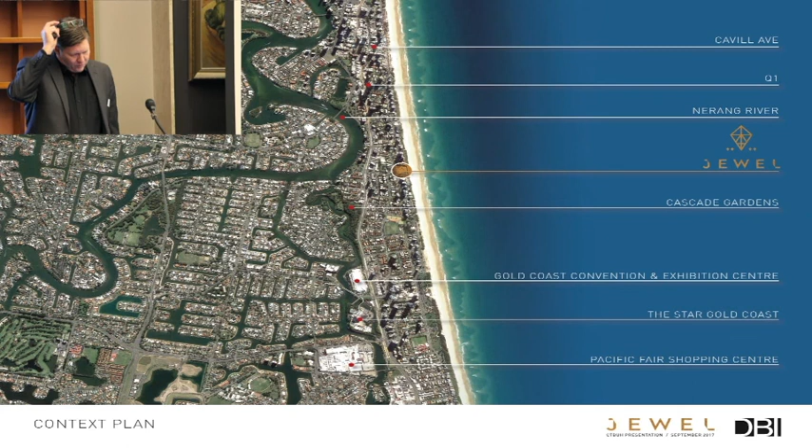When the site was first amalgamated, it was back in the pre-GFC days. Back then, the strategy for amalgamating key sites was basically just keep throwing money at it till people said yes. Ultimately the site ended up costing $125 million for an 11,534 square metre site - about 11,000 square metres, roughly $11,000 per square metre, which at the time for the Gold Coast was actually very high, but given some of the prices these days it's probably on the low end.

The site is exactly halfway between Surfers Paradise and Broadbeach. Surfers Paradise is viewed internationally as the more tourist-focused destination, whereas Broadbeach is more for locals, if you like - that's where we tend to want to be.

The boundary with Surfers Paradise is Wharf Road, so the Surfers Paradise precinct is to the north, and Broadbeach is immediately to the south, so we were in the high-rise precinct. The site has 112 metres of absolute beachfront land, so at the end of that amalgamation process, it is the largest piece of absolute beachfront land available on the Gold Coast.

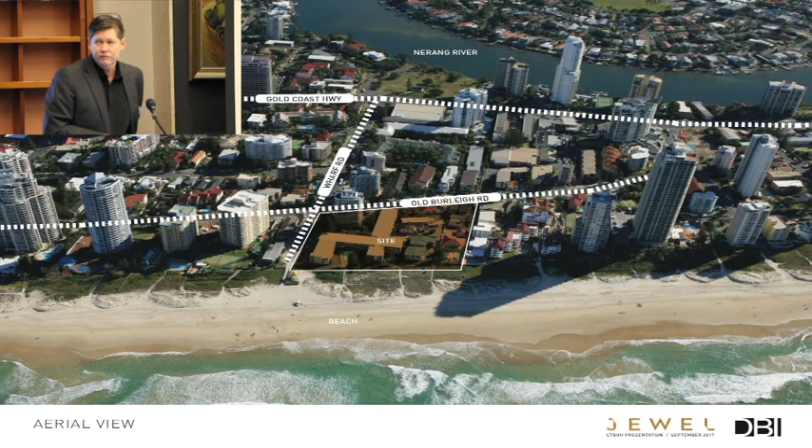This particular part of the high-rise spine - those who know the Gold Coast know it's essentially right along the beach edge - this part of the Gold Coast had been neglected by developers for some time. As you can see, it's mostly 3-storey walk-ups, some 7-storey buildings, 15 and 25 storey buildings. The tallest building is actually Aquarius, which is about 40 storeys, but other than that it's pretty old stock in this region and quite low rise.

The proximity of the site to the new Light Rail Station, the Nerang River, and Nettie Harper Park there - there's also talk about a future ferry terminal that would connect back up into Surfers Paradise, Broadwater, SeaWorld and run through there. With the Light Rail Station, bus stops, and the main Gold Coast Highway, it was seen as a good location in terms of connection, and as I said, halfway between two main precincts on the Gold Coast.

One of the most often heard complaints about the Gold Coast is its poor utilisation of beaches and respective facilities. Presently the only way visitors and tourists can actually enjoy some food and a drink while being close to the beach is to go to one of our surf clubs.

There's actually only 4 restaurants that are right on the beach on the entire coastline of the Gold Coast. Unlike when you go overseas, where resorts are right on the beach, that's not the case here. So Jewel was thought to be a significant step towards rectifying the situation.

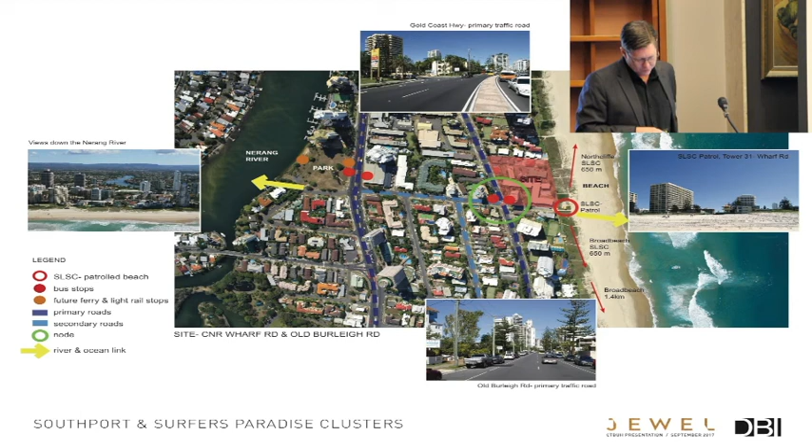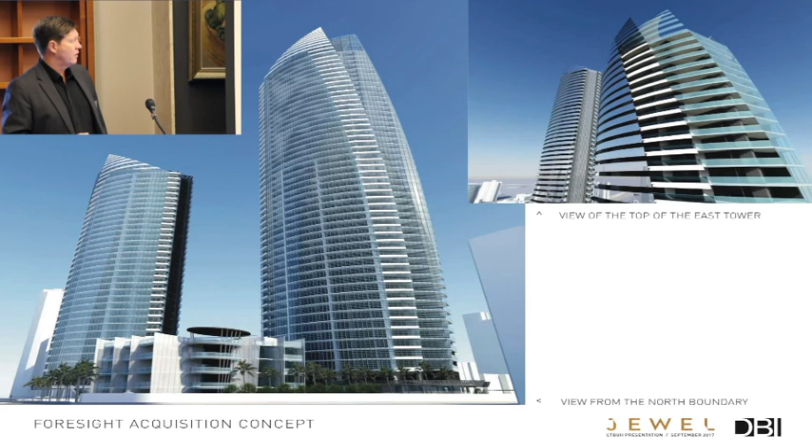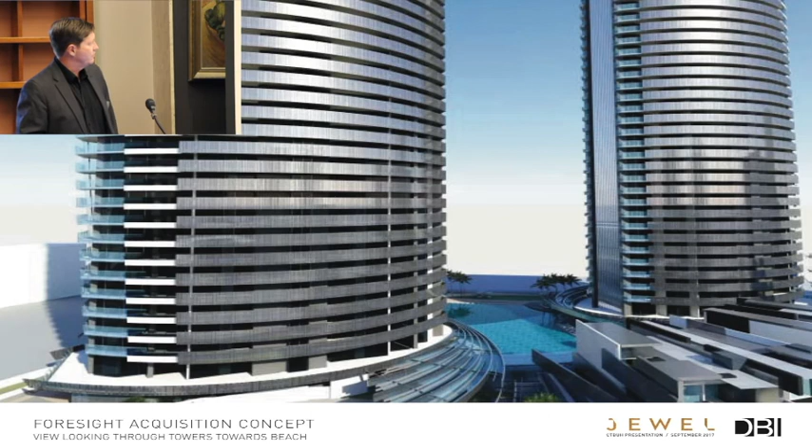The initial concept was by Foresight Acquisitions, and it was a typical residential play. It was high-rise, all apartments at the higher end of town, some beach villas right on the front, but once again, it was intended to be high-level amenity, pools, spas, gymnasiums, that connection through to the beach.

Then basically along came the GFC, and the developers struck some funding issues, and it was at this time that the Ridong Group from China purchased the site in mid-2010. Stephen Haggart was the then CEO of Ridong Group Australia, and decided that they wanted to do an international design competition.

So it was a selected competition, and the great thing for us was that we got to pick who we wanted to work with. So we sat down with Stephen and we worked out that it'd be great to work with Ken Yeang from Llewelyn Davies Yeang. He's probably one of the most respected architects in sustainable design within our profession.

They're based out of Singapore. Marks Barfield from London - they developed and designed the London Eye, that's probably their most known project. And then Chad Oppenheim from Oppenheim Architecture in Miami.

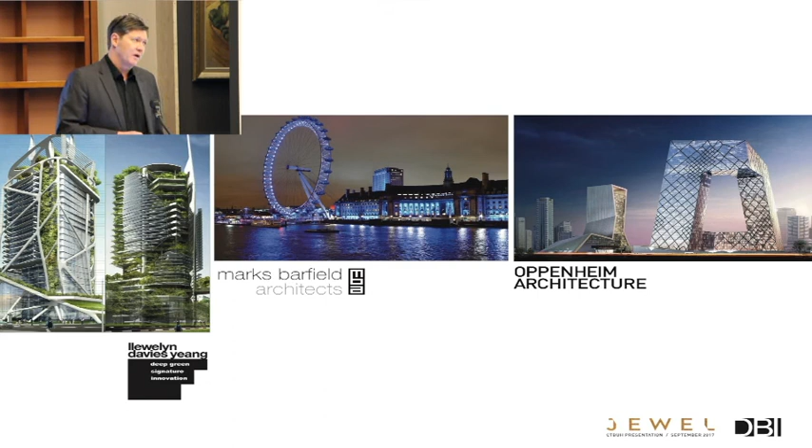So the Gold Coast, as people probably are aware, has always been referred to as Australia's version of Miami, with a similar climate, being a beachside tourist destination city. So we thought it made sense to see what the top architect in Miami was working on at the time.

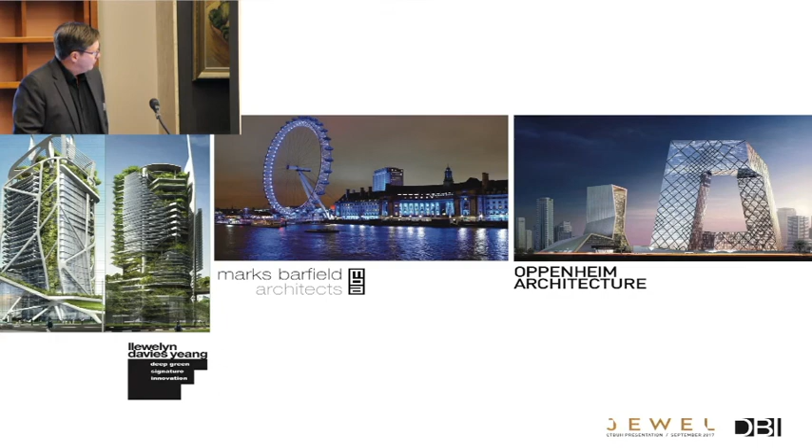So when the guys came over, we got to basically give them a briefing of what we thought were the main influencing factors within the Gold Coast and the greater region.

So the first element that we drew inspiration from was the geometric forms and crystalline volcanic structures that underline the geology of the Gold Coast region. This topography basically came from the result of the Mount Warning shield volcano - actually one of the oldest volcanoes within the world. So that basically created the region that we live in.

Some of it can be seen on all the headlands in New South Wales and the Gold Coast with these rocky kind of outcrops. So this is the Giant's Causeway in Fingal, and really kind of represents some of the structure that we could take from nature.

The second influencing thought was the rainforest that actually surrounded our city. Between Tweed Shire and Gold Coast City, we actually have some of the - I think it's actually the largest amount of World Heritage listed parks and reserves anywhere in Australia. So we're basically trying to bring the rainforest back down to the beach. These were some of the ideas that we explained that we thought were key to this potential project.

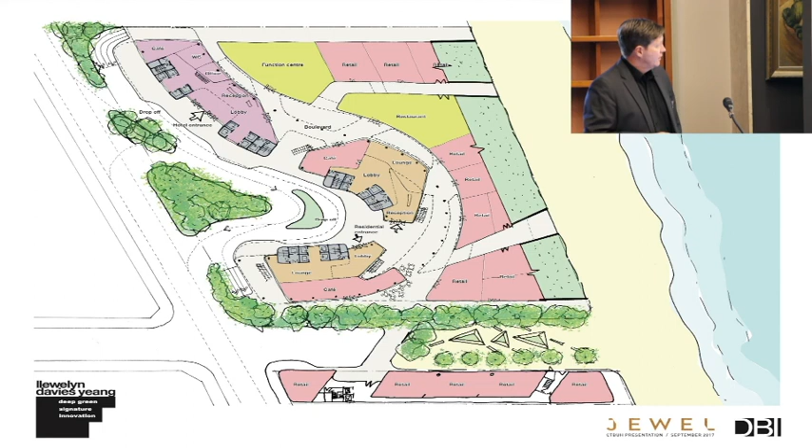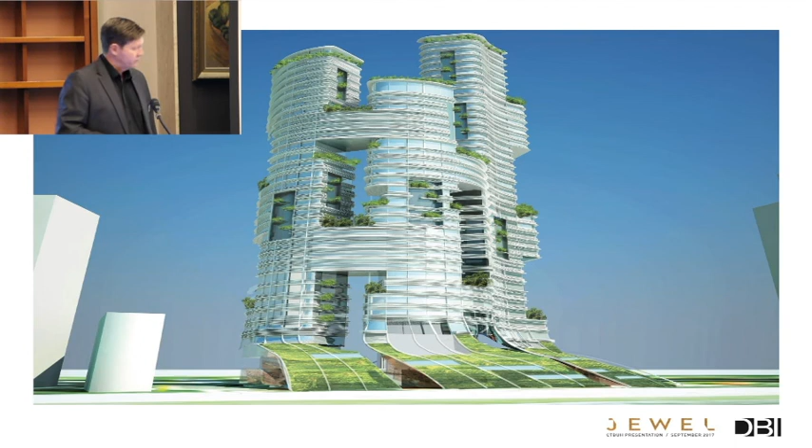So Ken Yeang's scheme - we all went away, came back with ideas, and their scheme, not surprisingly, was very green focused, heavy on the sustainability, and they were literally trying to bring the rainforest back down to the beach. Single tower option, which perhaps may have been a bit too large for that particular scale of site.

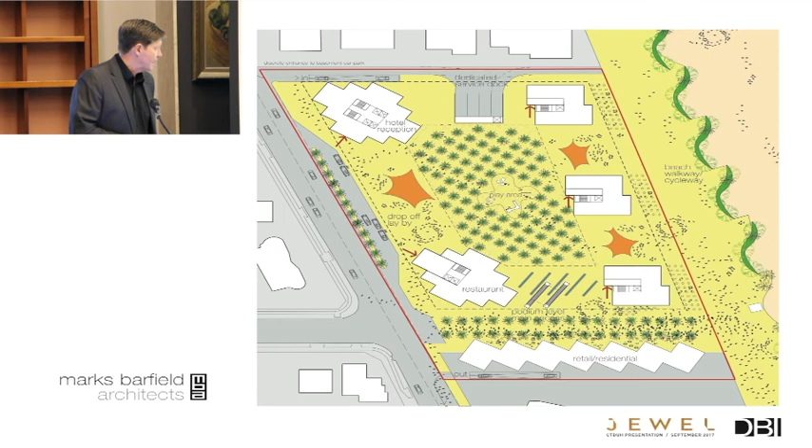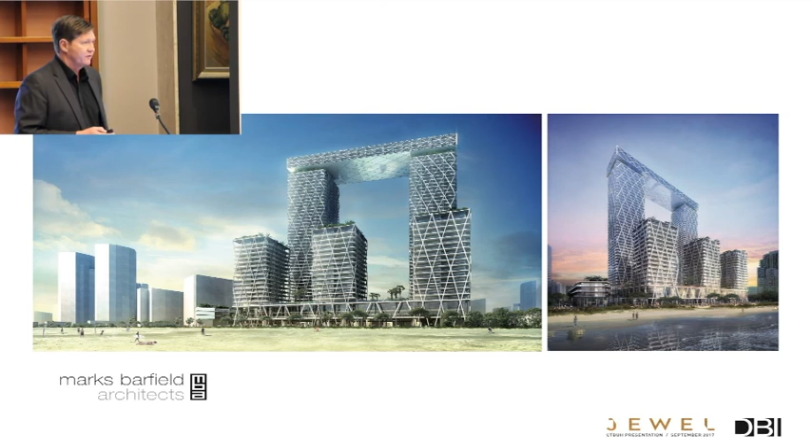And then we had Marks Barfield, and they had a different approach. They thought that they'd do a series of towers sitting within a landscape environment. 3 smaller towers on the front, 2 taller towers at the back, with the bridge connection being for residence facilities, pools, restaurants and stuff like that.

Out of the 3 architects, I guess Oppenheim Architecture seemed to perhaps have a clearer understanding of what we were trying to get to in the Gold Coast and the greater region. So for that reason, Oppenheim were chosen as the architects, and at the start of 2011 we started developing the concepts together.

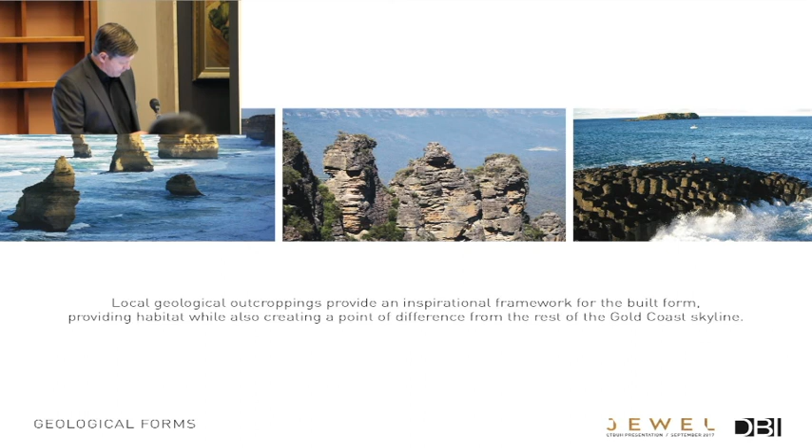So this was one of their presentations that they put together. You can see that they're picking up on the geology, and the image to the right there's another one of Fingal. I really kind of like that one. They went a bit further afield, picking up Blue Mountains and Victoria, but just trying to work with that and developing this idea of crystals.

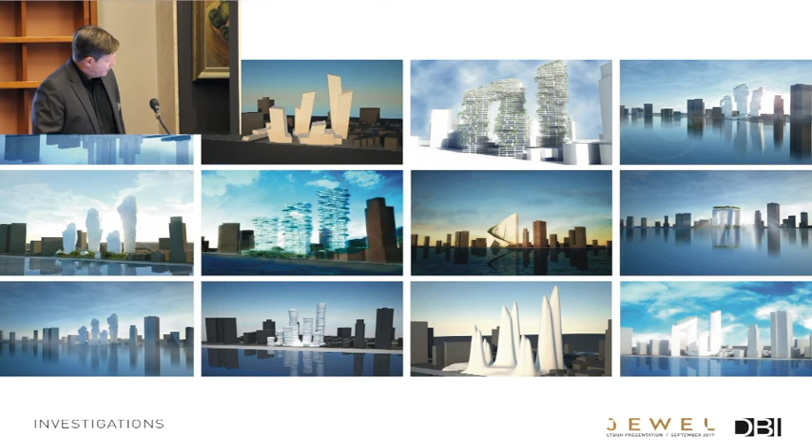So over a 3-month period, we basically explored a lot of different options and how we might actually fit the buildings on the site and how they might work.

It was actually quite an interesting process because we had 3 architects on the job. There was DBI, there's Oppenheim, and there's also our client Ridong, because Stephen Hagger was actually an architect by training, and as we know, once an architect, always an architect.

So he basically set up residency in one of our boardrooms for 3 months, and he'd be working late into the night, would come in the next morning and say, oh, what about this idea? This went on for a three-month period, but to his credit, he stayed true to the design direction, and at the end of it, I think we got a really highly resolved concept, even though it was earlier on.

He got a 3D scan, and we started to put that into CAD and started playing around with it. And essentially, that's where we ended up with Jewel. So these were the first concepts produced.

As I said, very heavily influenced by trying to bring this green back to the beach. Water connections, obviously, 3 towers so that you got enough separation on the site, and you could orientate the buildings, maximise views, and I guess probably help reduce the scale a bit.

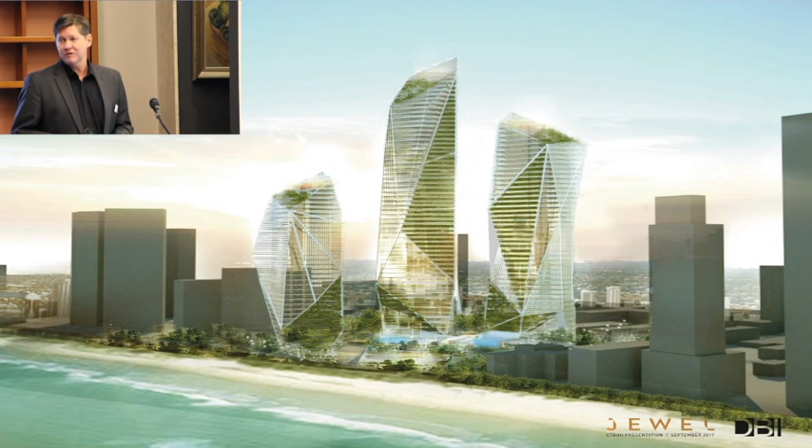And that's exactly what's happened. It's quite amazing the impact of Wanda coming to the Gold Coast, coming to Australia, it's actually had. We work in China, and when we go over there and present our CV and they see Jewel, they go, oh, you're doing that for Wanda. So everybody knows about it in China, and everybody kind of knows more of the Gold Coast in China and Australia because of it. And it's actually seen as one of Wanda's best projects. So that's actually quite good for everybody, I think.

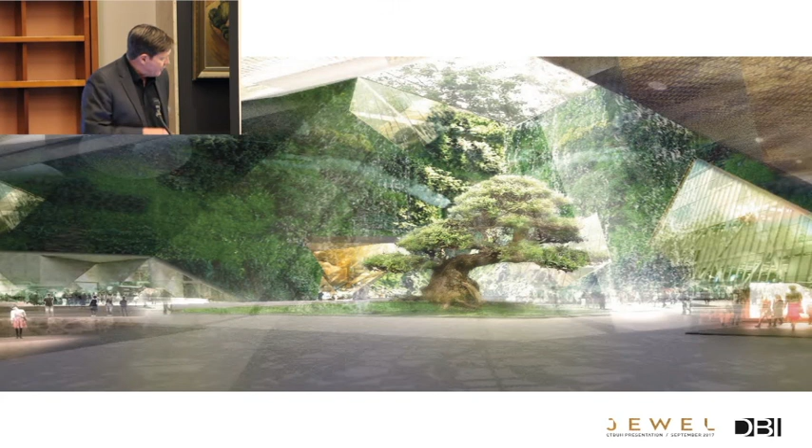So this is that kind of natural arch image going into the porte-cochère. We ended up obviously changing that, but basically because it lost any connection through to the beach. But these are the first kind of ideas that we had.

And basically we were on quite a tight time frame from the client to get the development application in. So the time difference between Australia and Miami wasn't working for the client, so they made the decision for us to basically take over the project so that they could get the DA in, which was a bit unfortunate.

We actually enjoyed the process of working with Oppenheim, and we've collaborated on quite a few different projects over the years, and it's always great to see how other firms work and what they're working on.

Before I start working through the plans, I thought I might throw out a few key statistics. The project value is sitting at just over $1 billion, with approximately 95,000 square metres of GFA. There are 3 towers. The tower to the north is branded as the Luxury Tower, at 41 stories. The central tower is the Hotel Tower below, with serviced apartments above, the tallest at 47 stories. The 3rd tower sits right on the beach on the southeastern corner, at 34 stories, branded as the Premium Tower, seen as the highest end.

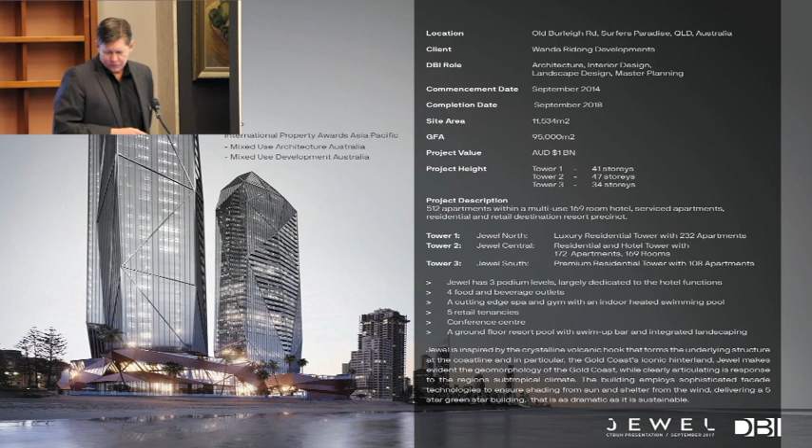There are 512 apartments in total, 169 hotel rooms, 3 podium levels mainly dedicated to hotel and facility uses, 4 food and beverage outlets, 5 retail tenancies, health and spa, gymnasium, conference centre, resort pools and bars. There are 3 levels of basement plus a mezzanine plant level, which Glenn will talk about the construction of, which was once again a bit different for the Gold Coast. There are 812 car parks. It's scheduled to have a soft opening of the hotel in September 2018, with the balance of the project to be completed in March 2019.

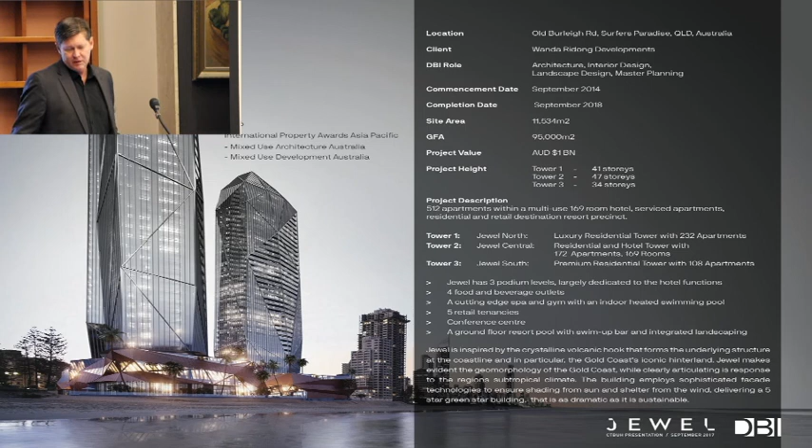Starting with the ground floor plan - so the main arrival is this central porte-cochere area, which serves as a drop-off for the hotel, for the function facilities, and also the Tower 1 lobby. The idea is as soon as you arrive, you get this view through the landscape pool area out to the ocean, getting that connection - green, green, blue, water, water.

Council's very keen on activating the edges of any development, so that's why the retail was running around the perimeter. We also had a second, more discreet drop-off for the premium tower, Tower 3, with a secondary pedestrian access back through into the main pool.

The all-day dining restaurant we located at ground floor here, so it will be a fantastic location to have breakfast - you're sitting there with the sun coming up, and the public will be able to get access into this facility as well.

One of the community benefit things we had to do - there's a surf life saving tower situated just outside the site. So when we did the planning for Jewel, we incorporated in basement level 1 some car parking, some storage lock-up for them to put their jet skis and paddle boards, a lounge area, showers, locker rooms. That's going to be a good facility for the lifesavers.

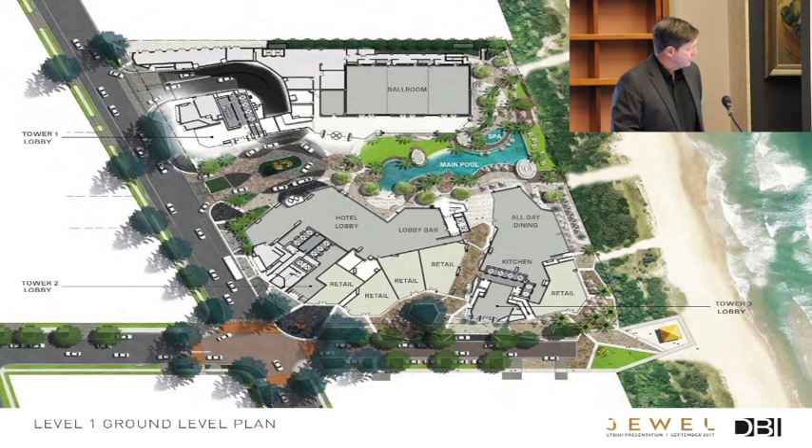Not only did we upgrade the street works in front of our site, we actually took Wharf Road all the way down to the Gold Coast Highway into Nettie Park, once again reinforcing that it's an important connection link for the Gold Coast and this particular project.

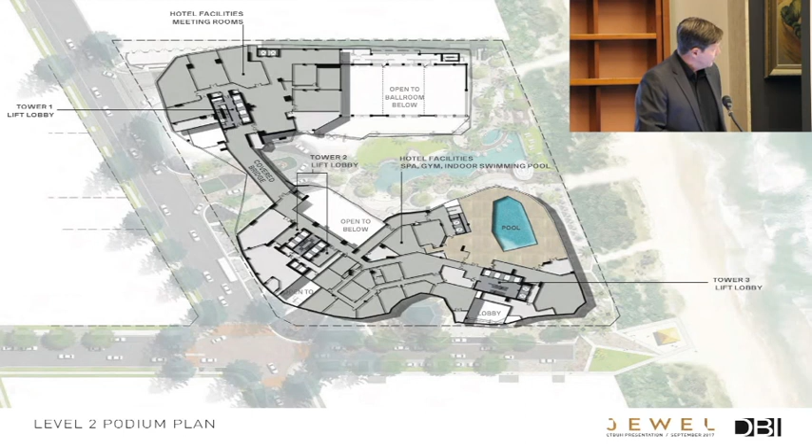Up on level 2, we had the second level of the ballroom void, conference facilities. Over here we had the health and spa, gymnasium, an indoor pool, and some back of house hotel facilities. The third level was the landscape deck area, so Tower 1, the luxury tower, had their own private facilities - gymnasium, function room, cinema, and direct access out to a second pool, kids' playground.

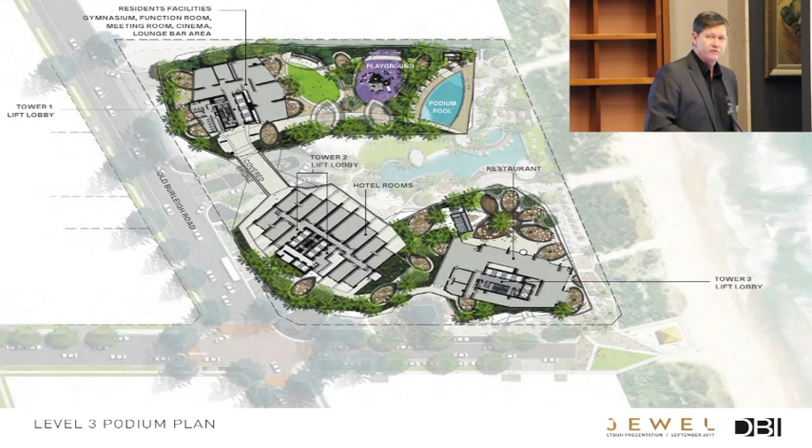The hotel tower - this is the first level of the hotel rooms - and then underneath the premium tower we had another restaurant going out onto the landscape deck. So once again you'll get that connection with the beach, and it'll be a lovely place to have breakfast or dinner. One of the underrated views of the Gold Coast is actually down southeast, because the beach goes down, wraps around to the corner, and you get views all the way down the coastline back to Coolangatta - it's actually quite a nice aspect.

So typical floor planning - we ended up with central cores on this tower, for a number of reasons. With our shape, which is a series of different facets moving in and out as the building goes up, we needed to try to get some repetition in our floor plan so that every floor wasn't different. The way we achieved this was through the use of balconies around the perimeter.

So we would get 6 to 8 levels, sometimes as much as 10 levels, which would be standard before we'd had to modify the floor plate. The client was very big on efficiency too, so we had to rework this core and the length of corridors versus the amount of saleable area that they had. So it was almost designing by numbers to some extent. We had to get to a minimum level of efficiency.

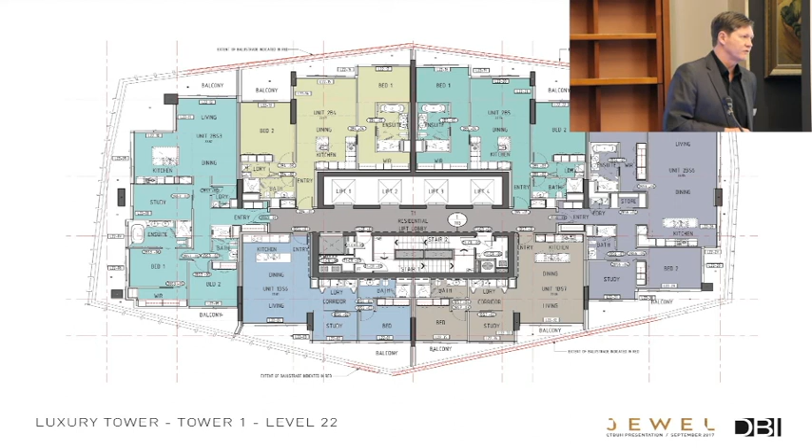The apartments, so this is out of Tower 1, the luxury tower. The apartments are all quite large apartments, and once again that was driven by saleable area and efficiency. This product wasn't going to be your typical Gold Coast product. As everyone's aware, it's kind of 15,000 to 16,000 a metre sale price, which once again for the Gold Coast is extremely high. I mean, it's still high for Brisbane as well. Nothing compared to Sydney though - I think I've heard 40,000 a metre on some projects down there.

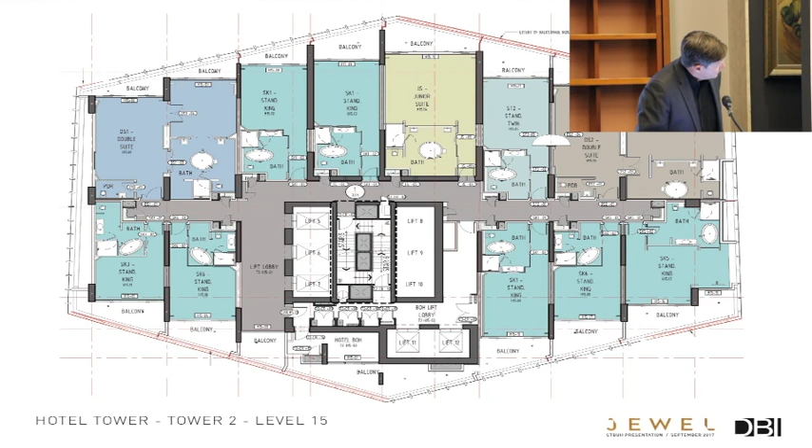So Tower 2 hotel - this is a typical hotel level. Once again, same kind of concept of wrapping the rooms as best we could around, obviously with the hotel. Service lifts, back of house sitting on the back corner. And sitting above that are some serviced apartments. So the idea of these, they'll probably go back into the letting pool. It's unlikely that with the purchasers buying these that they'll often be there, so they'll add to the hotel stock.

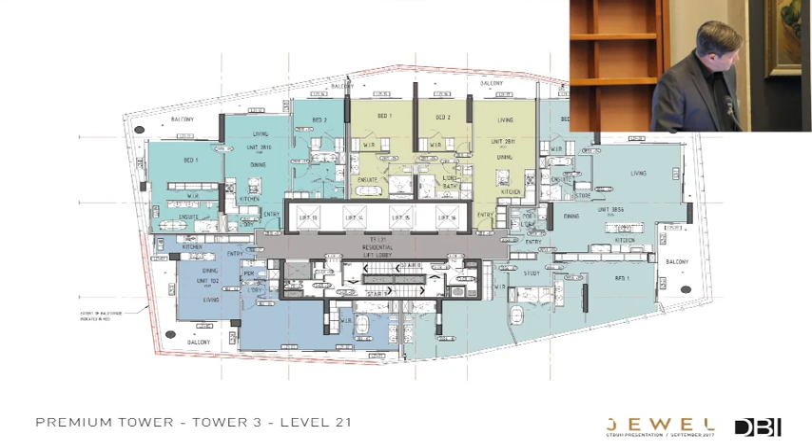The premium tower, these were larger again in terms of sizes of apartments. And this one here, while it's on the back southeast, as I said, it's got actually great aspects down the coastline. Some of the just larger apartment designs - so these are higher end, all timber floors, obviously marble, etc. running through.

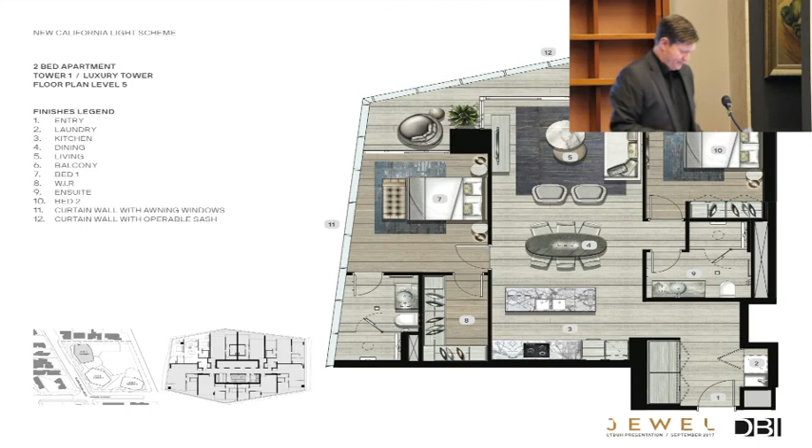Typical 2-bedroom apartment. As you can see, all the rooms are very generous. They've all got 2-3 bathrooms, powder rooms, large kitchens - higher end product.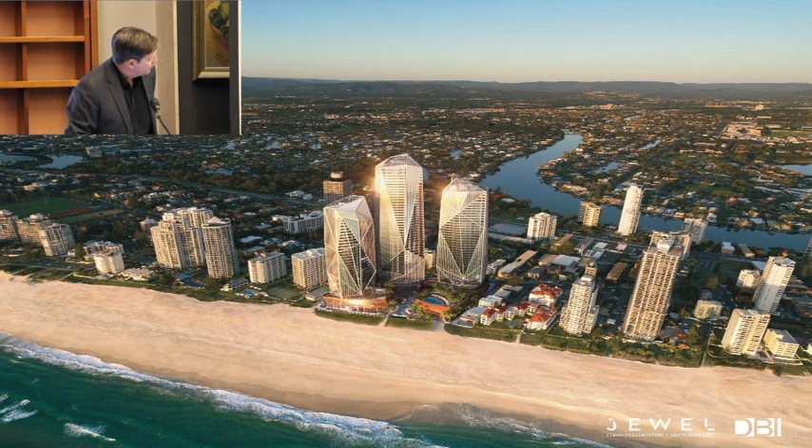The podium, the idea is it's smaller crystals as per those images. You can kind of see quite a high level of reflectivity there, and that was something that we actually wanted as well. We didn't actually want you to be looking completely into all these buildings. We wanted a bit higher level of reflection, and it's kind of 15% on the glazing for this building.

So that's the smallest tower. It's probably not the flattering angle - I think it's the only angle where we actually look like we've got a square top. It's all these prisms and facets running through.

Starting to see what's happening with the podium. The quality of the podium was very important to us because that's really what the public's going to see and be walking past. And there's a bit of stir since they've taken away some of the screening on the ground floor now, and people are actually getting a feel for the scale of this project. While it's a 3-storey podium, it's probably equal to 5 levels in height, and there's quite nice high volumes in the lobby spaces and the arrival porte cochere.

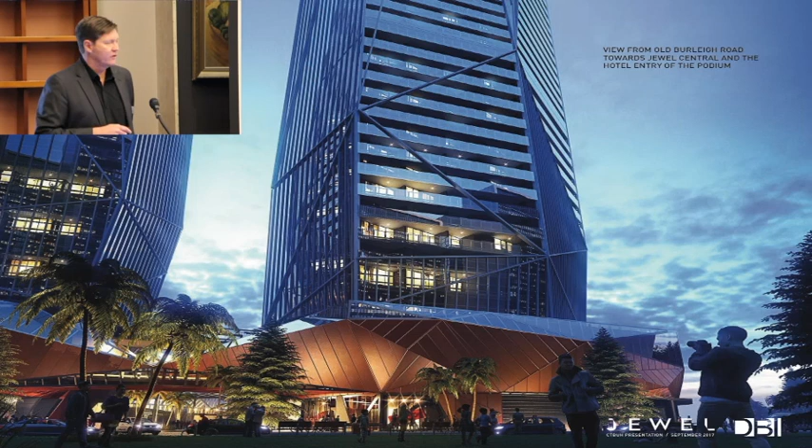So you can kind of see our copper - that's meant to have a bit of an earthy tone to it, so as if it's kind of coming out of the ground. You've got the landscaping around, and then you've got the cleaner crystals rising above.

The porte cochere arrival experience, so a sculpture in the middle, and you'll get glimpses straight out through the ocean, so you'll be able to look through our pool area, look at the water and get that connection through. We can kind of see on a busy night when there's a function in the ballroom and guests are arriving in the 5-star hotel that hopefully this is going to have a real buzz about it.

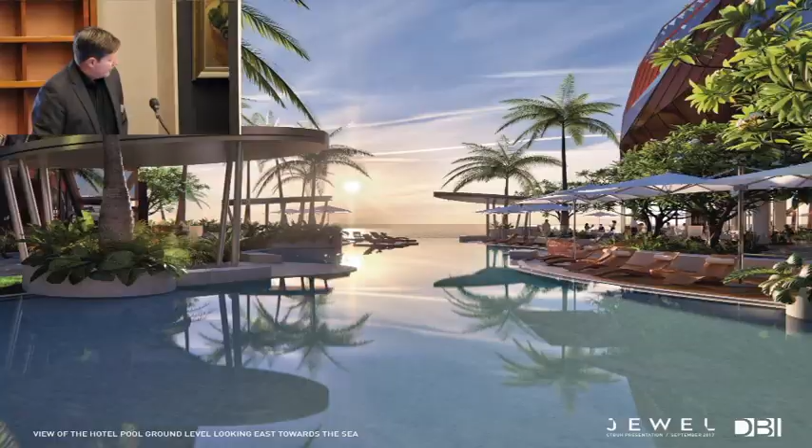That's the main pool area, looking directly out to the ocean. There's the all-day dining restaurant.

I said you're going to feel like you're right on the beach, and this will be the only facility of this type on the Gold Coast. So, typical view from an apartment.

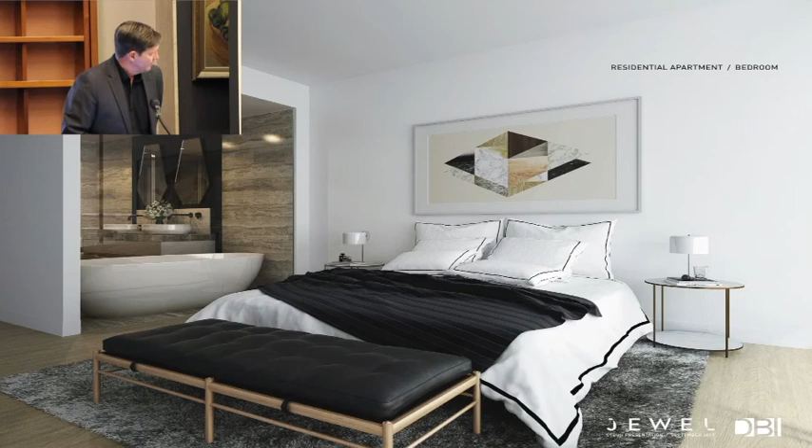Typical apartment, ensuite in the back. So you're maintaining views from the bathroom through the bedroom out to the ocean. It's always important to have that connection. As soon as you walk into your apartment, you want to make sure you get that connection out to the ocean.

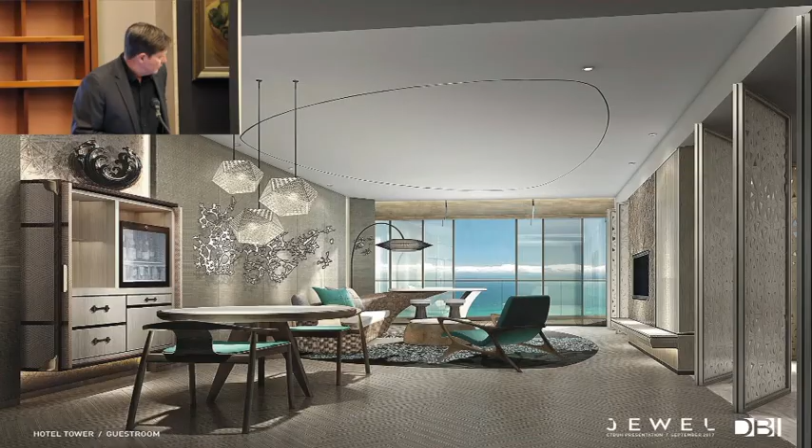So this is one of the hotel guest rooms. You can see that it's kind of getting a bit more lavish, and probably a different style to what we're used to here in Australia, but remembering this is more for the international market - it's not just for the Australian market. I think that's been something we've had to learn while working with Wanda and the Ridong Group for this project, that it's not about Australia or the Gold Coast market or the Brisbane market, it's about the international market, because that's where this thing's been sold to.

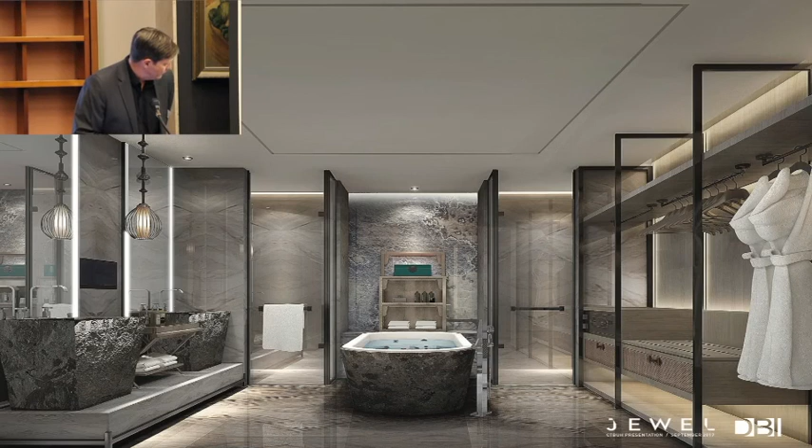Bathrooms - so a lot of use of stone. The Asian market, they don't like painted surfaces. They prefer to have a material, be it wallpaper, stone, or timber panelling. Lot of corridors in the hotel.

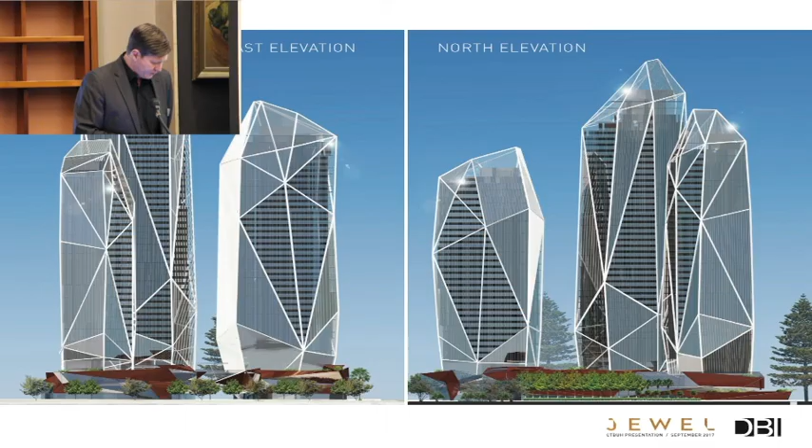So some of the elevations from the early days. The logic behind the facade system that we've got - originally we had three different types. We had your standard open balconies, which were intended to look northeast, so open views, not really susceptible too much to the strong winds. The predominant winds on the Gold Coast are the southeasterly winds, so that's where we've introduced this curtain wall.

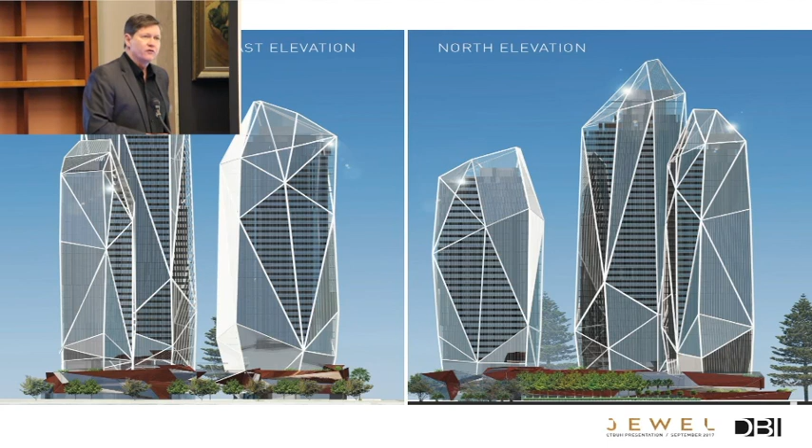So it's a winter garden type effect - your balconies will have windows that open up. Initially they were folding up, now they're folding out. They're actually to protect you from the strong southeasterlies, which occur probably 70-80% of the time on the Gold Coast.

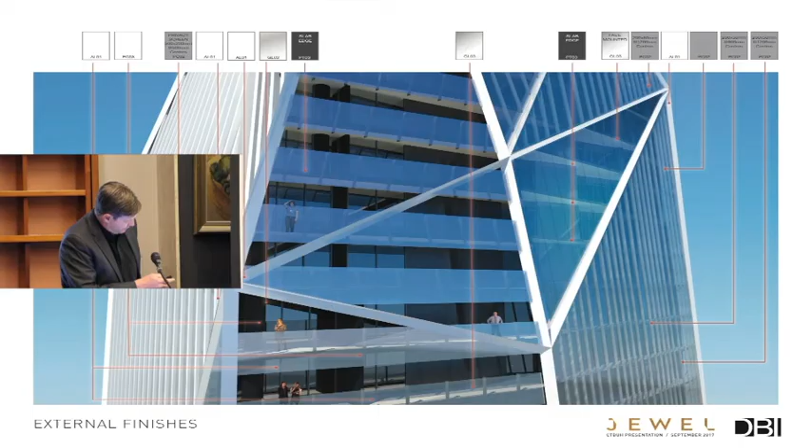And then we did have a third type, which was on the back of the building, the western side, which was a brise soleil. It basically is a really deep solid element, a series of fins running up the western side to provide shade onto the building.

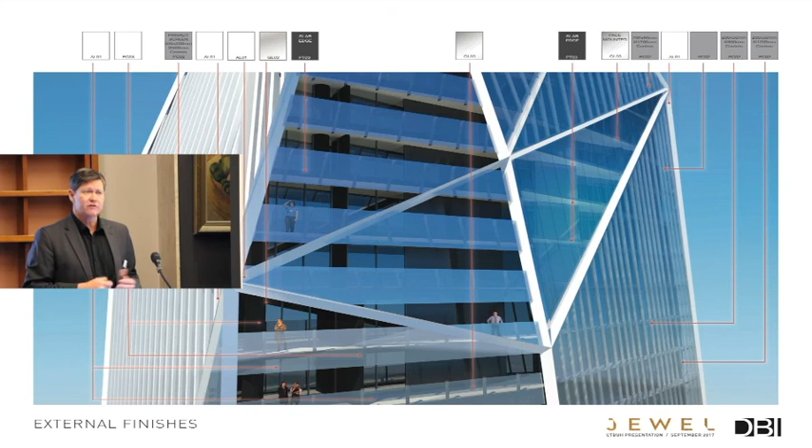This has achieved a 5-star Green Star Design certification - we actually only got that about a week ago. They're not going through with the full built 5-star, but we've got the 5-star rating for the Design stage, which is quite an achievement. I actually believe it's the largest 5-star design residential project in Australia at this point in time.

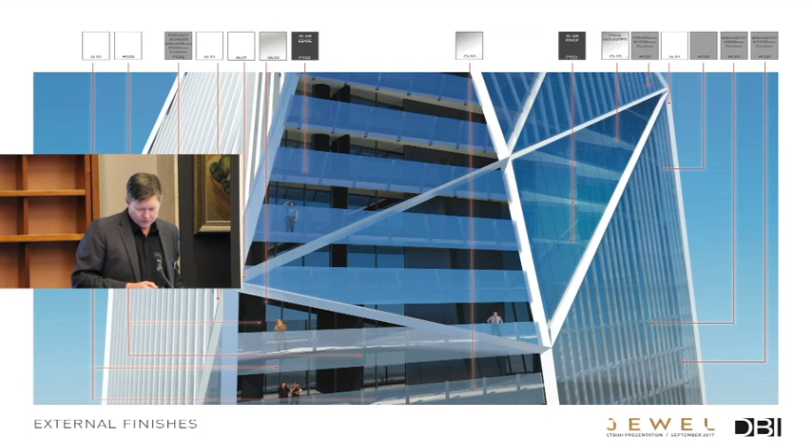So you can kind of see the different materials - the exostructure, these main elements running through, are a steel structure clad in aluminium. The glazing is basically a grey tint glass with 15% reflectivity. The curtain walls are a double glazed system.

I'm going for time. Let's speed up a little bit, not too far to go.

One of the interesting things is that this facade is complex, and we probably don't want to do another building like this. It has been extremely challenging, but also interesting. The subcontractor for the facade basically said, look, we can't build this, these connections that you're talking about, you just can't do it. Well, fortunately these days you've got Revit and 3D modelling, and we've got a 3D printer. So we printed out these connections, basically walked into a meeting, said, no, you can, look here, we've built it. So they then had to go away and work out how they could actually build it, and they have.

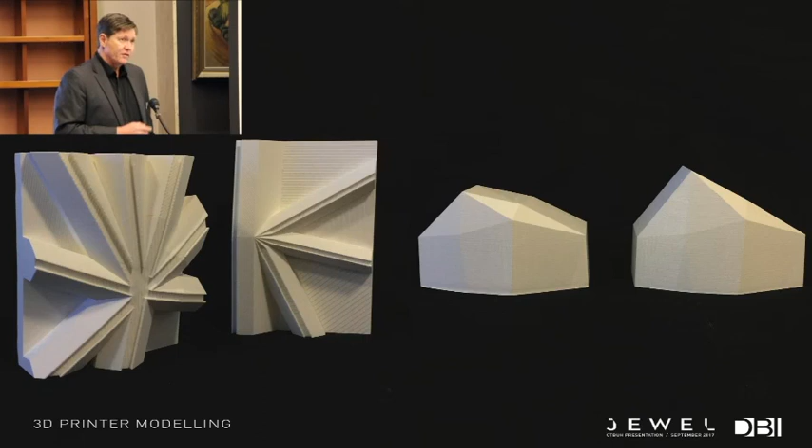So there's been a series of prototype meetings in China. We've had full-scale models, testing, etc. being done. So the first panels are actually going up on the facade on the lower levels at the moment. Their program is to try to get 20 up a week. I think they're only about 5 at the moment, but they're only just starting to get into a bit of a routine.

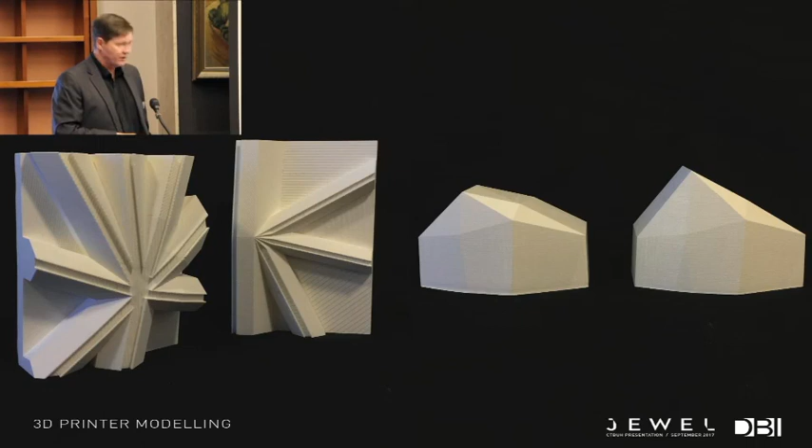The other thing we've had to play around a lot is the rooftops, because the plant height sizes have been moving a bit. With new technology these days, you get it printed out, go into council and say, look, we want to change the top of the building. This is what it did look like. This is what it looks like now.

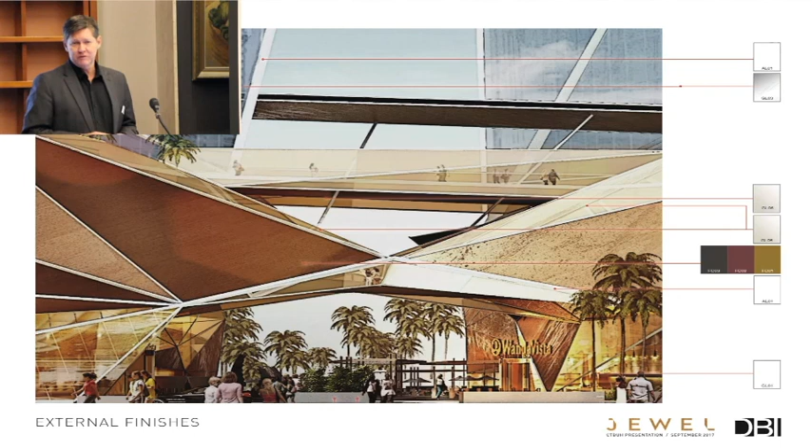So the materials on the podium, as I said, it was important that it's kind of rich and earthy, and you've got the landscaping. It's basically a bronze copper aluminium panel. Fortunately, it's not a composite panel that is in the news at the moment. So it's actually aluminium, then there's a gap on a frame and a compressed FC panel sitting behind that. One of the challenges we've got is to actually make sure that the first hailstorm that comes along doesn't end up leaving this thing with a whole series of dimples, much like the entrance to one of the tunnels we've got here in Brisbane at the moment.

So, yeah, some bronze glazing on the upper levels, and clear glazing will actually occur on the bottom.

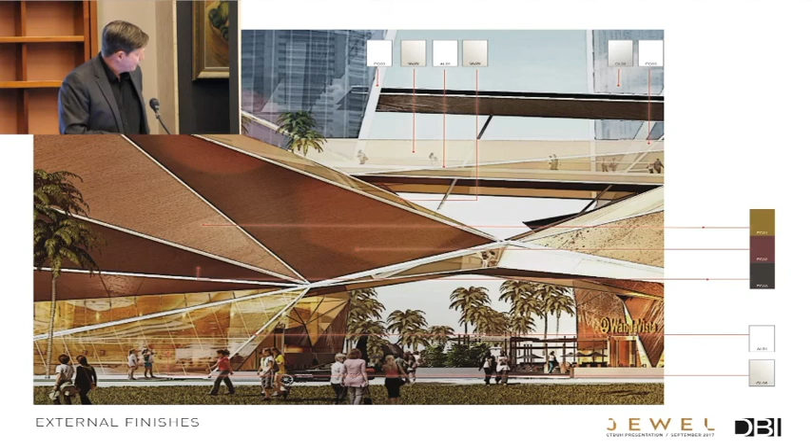So I guess one of the other interesting parts of this journey has been the approval process. We started and submitted that package with council in 2011. There were 14 objections received during the advertising process. Basically, council didn't deem that any of those were worthy to hold up the project. So we received approval towards the end of 2012. Unfortunately, two objectors didn't particularly like that decision, so they appealed the approval in court.

This, as we mentioned, was during the GFC, so the state government decided that this is a state significant project, an important city building project for the Gold Coast, so they were going to call it in. Then we had another 9-month process of working through with government to gain our approval. By calling it in, basically what they did was cut out the opportunity for those two objectors to actually appeal the project, so we ended up getting the project that we wanted.

So Wanda came on board during this time when we were going through state government. Basically our client, Mr. Lee from Ridong, was looking for a joint venture partner, and the chairman from the Dalian Wanda group, Mr. Wang Jianlin, during a visit to Australia and the Gold Coast looking at development opportunities, met with Mr. Lee, and they formed a partnership in 2014.

We then went through another kind of process because Wanda always intended to be the operator for this project, and always intended to retain all the retail and F&B outlets, so they wanted their own stamp and branding on it all, and basically that's what's ended up with Jewel today.

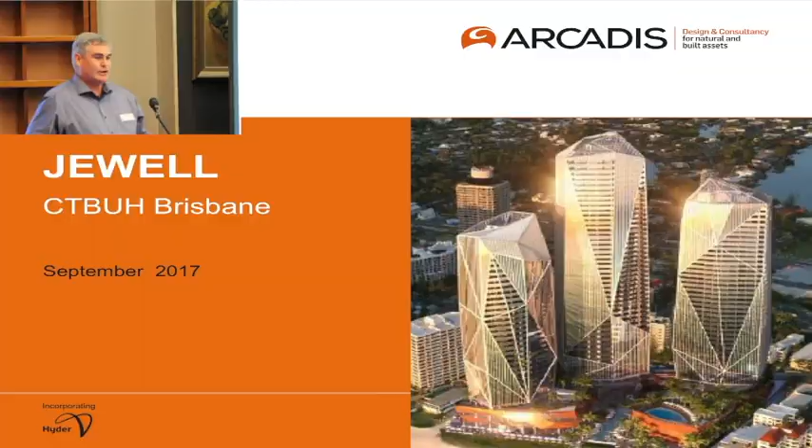Thanks, John. Thanks, Rafe. I'm going to probably not spend so much time talking overall about the project. I thought I'd just pick on a couple of interesting aspects around the structural engineering we had to deal with as we were going through it. I'll talk briefly about the structural systems tied up with the building, then go through some of the work we did on basements and how we worked some value engineering into that, some stuff around the foundations, and a bit of a talk around the construction.

As Rafe said, buildings like this take a long time to turn into actual projects. I started on this project around 2010, just before the international competition started, and we worked at that time on a number of different solutions to get through to the ministerial approval and getting the DA done.

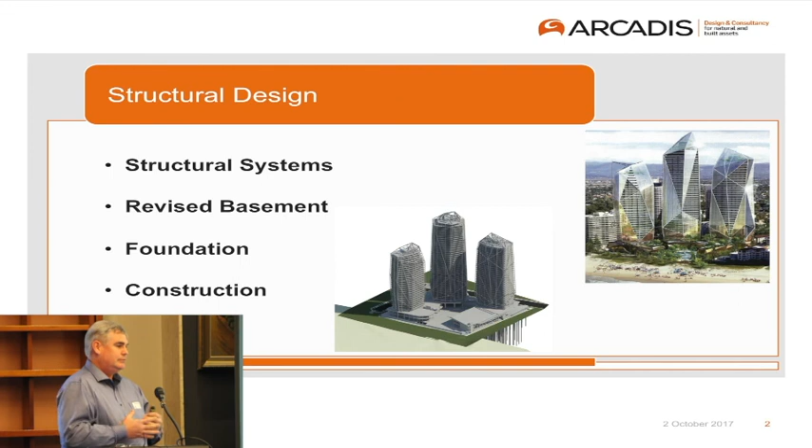After they got the DA in place, Mr. Lee started talking to a number of Chinese companies overseas to try to partner up with them. Ultimately they worked with Wanda, but before that they spoke to a number of state-owned companies. One of the more interesting discussions was with China Rail, who develop and manufacture a lot of steel overseas. At that time, similar to what Chinese companies are going through now, it was difficult for them to export cash out of the country, so they needed to export as materials and equipment instead.

So we had a number of discussions with Mr. Lee, looking at alternatives and working with steel. We looked at what we could do with a steel solution. The problem was that the DA was set, the height of the building couldn't change, so we couldn't increase it, and the floor-to-floors were already quite tight, so we couldn't introduce any reductions there either. We went through a process of looking at asymmetric I-beams with precast, either metal decking or metal sheeting going over the top, or looking at hollow-core precast to form the floor slabs, and we worked up a solution with this.

We also looked at an option of bringing steel in for the core as well, and framing the core up in steel. We went through the process and came up with solutions.

We went through an exercise of looking at the steel solution, post-tension, conventional reinforced, and some alternative precast options, and put them together. We worked with one of the builders at the time to do a pricing exercise. Interestingly, what they found was that the most economical solutions were the in-situ concrete and the post-tension concrete. When they looked at steel, even though China Rail were going to supply it, by the time they did the erection and transport to site, it was about the same cost as doing in-situ concrete, and then you had to add the procurement of the steel on top of that.

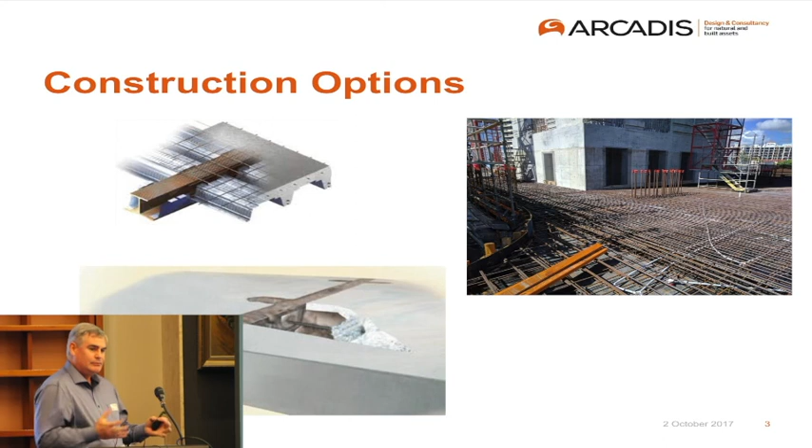So we ended up with what's a fairly typical concrete structure for the building. In green is the core structure, typically an in situ concrete core reasonably central through the building, with a number of cores linked with link slabs through the corridors to stiffen and join them together. Concrete columns, in situ concrete columns, and in situ concrete slabs. As Rafe talked about, we tried to work with DBI to come up with locations for the columns that could be pretty much consistent all the way up the building, and the shapes on the outside were generally achieved by increasing and decreasing the size of the balcony cantilevers. We tried to keep it very simple. There were some areas where we had to have sloping columns, but generally it was pretty straightforward.

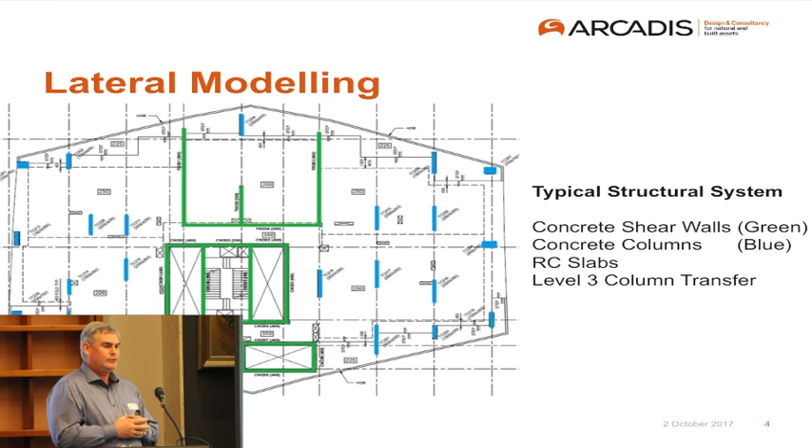So we took that design and generated lateral models to understand the performance of the buildings, how they would perform in the wind, looking at what we needed in terms of loading and dynamic performance. We worked through with CPP, who were the wind engineers. They generated a model to put in the wind tunnel. We ran it through, gave them the information on the buildings, they ran it through the tunnel and gave us back the results, which we used to refine our design further.

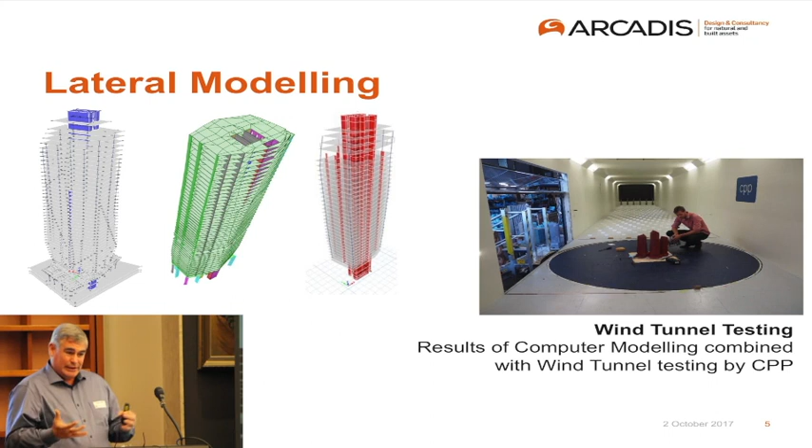One of the things we did very early on was try to eliminate the transfer in the building, as it was a very costly exercise. So we worked with DBI and the client to try running a column layout down through the podiums and into the basements. What we found was that made the basements very inefficient in terms of car parking. We started to have to look at going from a 3-level basement up to a 4-level basement, and coming into issues with the additional basement level, as Rafe was alluding to, we were going quite deep and had to look at what we needed in terms of shoring.

Typically on the Gold Coast, with a heavy gauge sheet, you're limited to about 12 metre length. A lot of it gets imported from China and comes in a container, usually about 12 metres. So typically on the Gold Coast, you have a 3-level basement, 3 to 4 metres at the first level, then 3 metres below that, giving you about a 12-metre basement.

This one, going to 4 levels, we were heading towards about 17 to 18 metres of excavation. We had issues with the length of sheet we needed to get in and the installation of the sheet. On the Gold Coast at the time, there was very limited equipment to install sheets beyond 12 metres length. We had concerns around dewatering and the ability to actually dewater the site going that deep, and then the costs involved - one, in extracting the volume of water needed, and the time frame it'd have to run before you could turn that dewatering off. There were also costs associated with the uplift loads on the basement, with the hydrostatic pressures and the piling or other means needed to hold the basement down.

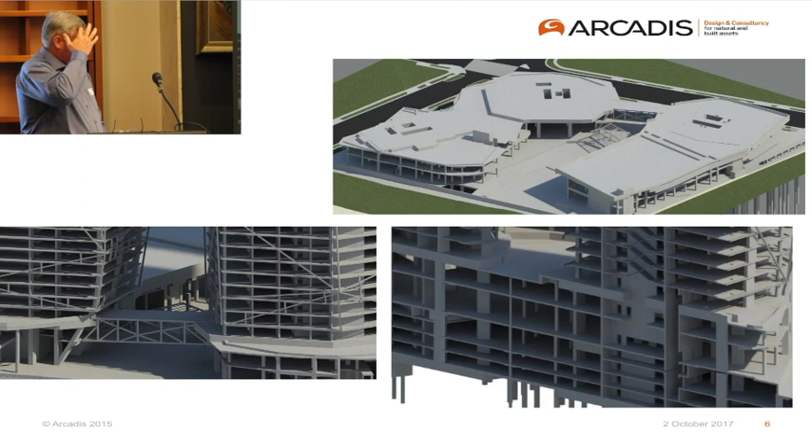So in the end, when we worked through all that, it was found to be much more economical to just introduce a transfer in the building and try to maximise the efficiency of the car parking in the basements. We went through the process with DBI to look at where that transfer would go, and we ended up with that transfer being at the level 3 podium level. So at each tower we looked at keeping it reasonably consistent - level 3 of each tower has got a 2 metre deep transfer. We did look at trying to put it at the podium level, taking it to ground level, but that was going to push the basements down further. So it was really an exercise in trying to minimise the amount of excavation work we had to do on the site.

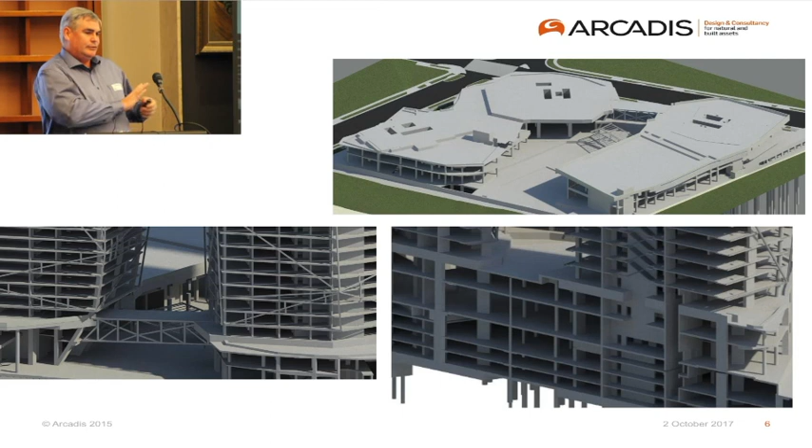So we went through a process, we came up with a solution, that got put through, and a DA was received. As Ray said, in 2014 Wanda became involved in the project and bought into it. Very early on, once Wanda got involved, we sat down and started looking at value engineering solutions.

We met with Steve Haggart, and one of the things we found was the solution we had at that time was a 4-level basement, driven by the efficiencies in the basement. Ray mentioned we've got 112 metres of ocean frontage on the site, which is fantastic.

But one of the things you have to deal with on the Gold Coast is the oceanfront boulder wall. In the 1970s, storms came through and washed away the sand, so the council decided that along the whole beachfront, developers have to put in place an oceanfront boulder wall.

We had a look at that, and what they have is defined as an A-line, which is the leading front edge of the boulder wall. On our site, the A-line pretty much ran along the boundary, and under the conditions you're not allowed to build any permanent structure within 8 metres of the A-line.

So initially we had the basements pushed 8 metres back from the boundary so that we were clear of the A-line and the boulder wall. When we started talking with Steve Haggart and with Wanda, we said one of the things we could challenge is whether we needed to build the basements 8 metres back.

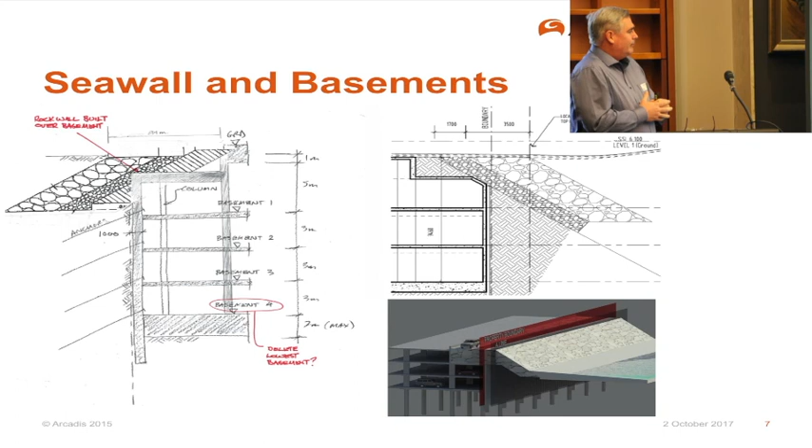They got on board, agreed with what we proposed, and agreed it could be done. We took that solution to a coastal engineer who provided a report on the suitability of the system, and then we put that through SARA and got approval.

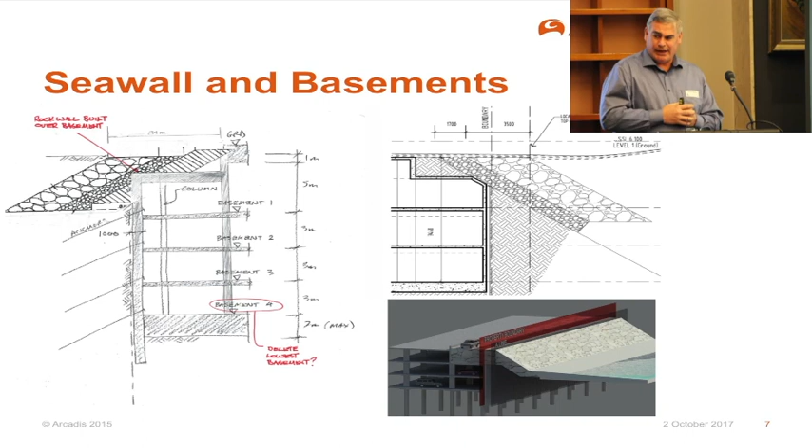The other interesting part around this building was the foundations. We did quite a lot of work looking at how we could get the foundations for this site to work. Typically on the Gold Coast, the sites are sand - about 30 metres of sand of varying density, down to a layer of clay and gravel, and then onto the rock about 35 metres down.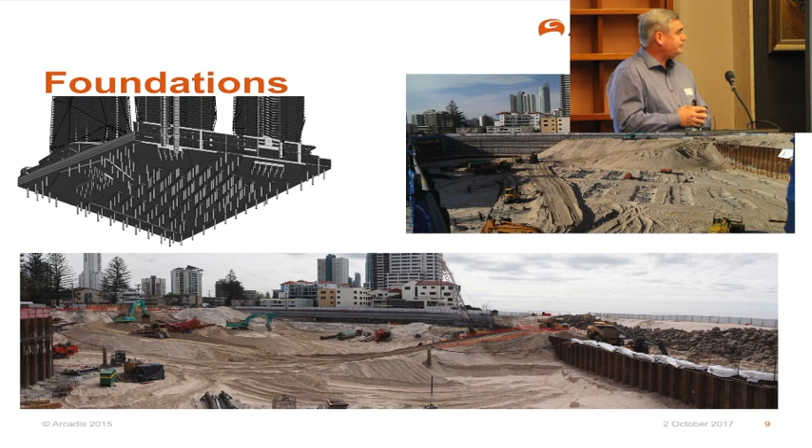We worked with a geotech engineer, and initially we wanted to try and get to a solution of just using raft slabs to support the building, which is not uncommon on the Gold Coast. We did quite a lot of work, initially some 2D work, and some analysis in 3D. We worked with a geotech, and had a peer review geotech engineer on the site as well, looking at upper and lower bound values for the soil properties.

So we could get an understanding of what performance might be for the tower. We went through and did quite a lot of analysis. The initial ones without any piles underneath the rafts, we were getting up to 75 mils deflection in the centre of the raft and about 15 to 20 mils at the edges. So we looked at what we needed to do to stiffen up, particularly the centre of the raft, working with the geotechs to put piles underneath the areas where there was deflection.

So the view there is from the Revit model we put together, showing basically the piling solution that came in. The other issue we had was the basement is hydrostatic, so there's quite a lot of uplift pressure on it. We needed to design a system to hold that down, so we used a series of tension piles underneath the podium areas. The towers themselves had enough weight to hold the basement down.

Towards the start of the project, we put together a D&C package for the piling. We came up with a design and put it out to the market. A D&C contractor came in with a less conservative assessment of the ground conditions, and they believed they could get a higher value for skin friction for the piles that would provide better hold down capacity. We went through a whole series of exercises with the geotechs to come to a solution.

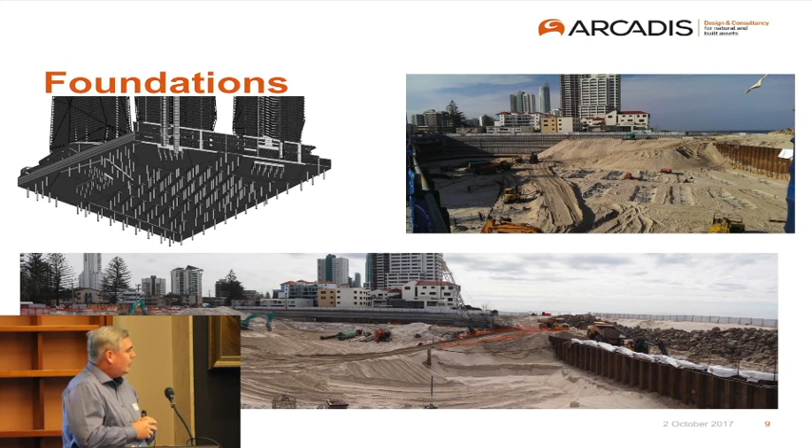One issue on the site, which wasn't fully appreciated by the geotechs at the time, was some dirty sand - generally the sands are very clean, but there were areas where the sands had fines mixed amongst the matrix. As we started taking their approach on what the skin frictions were, we wanted testing done on the piles, so they set up a tension test.

They went through and did a test very early on with the piles, and found that the ones in that dirty sand area failed the tension test - they pulled up before achieving the capacity that was supposed to. We then went back through a process of assessing what that meant, understanding better what was happening, and redesigned the piles, introducing additional piles to provide the capacity. Interestingly, where we ended up in terms of skin friction capacity was similar to where we'd been right at the start of the project.

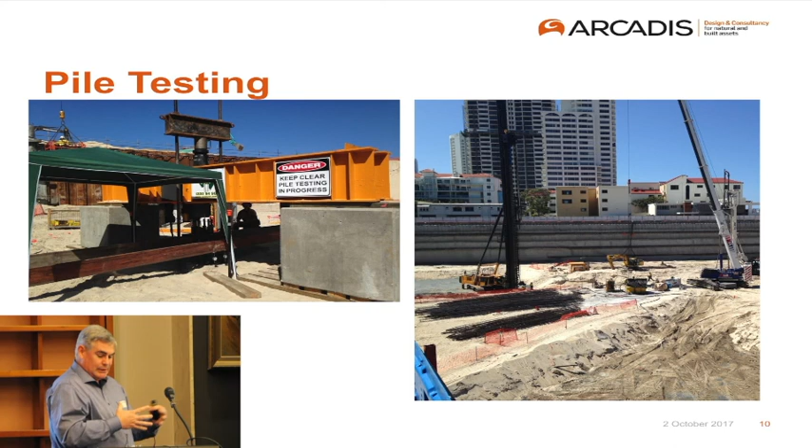In 2015, Multiplex came onto the site. At that time, the site had been excavated and we had sheet piling in place. On the northern boundary we had adjoining neighbouring properties, which we had been concerned about with vibration. So they had sheet piling to the west, south, and east, and to the north we had a contiguous pile wall that was shotcreted over to provide the hold back of the sand.

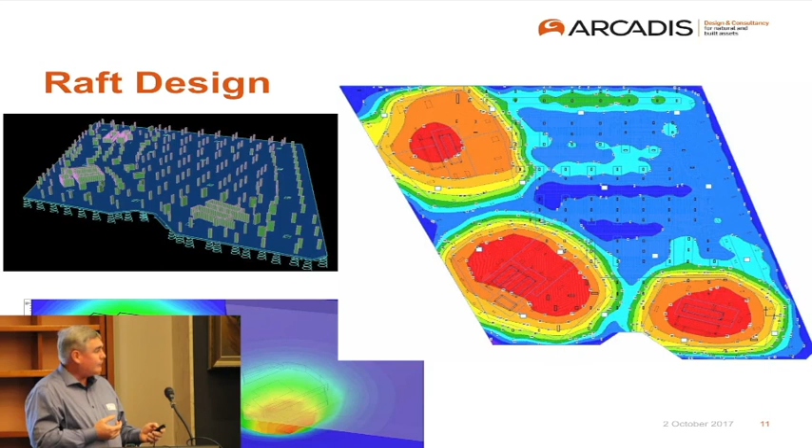So that then formed the site. Multiplex walked on, piling was in place, and the rafts had been excavated down. One of the first things we then worked through with Multiplex was the design and construction of the rafts. As we talked about, there's something like 2,000 cubic metres of concrete going into the rafts, and the quite big pours had to be done in one pour.

So we sat down, and one of the things we were concerned about here - the interesting thing here - was controlling the heat of hydration that was going to occur with pours of this size.

The concerns are that if the concrete becomes too hot, if the core of the concrete gets too hot, over 80 degrees, you'll have issues longer term with expansion and cracking of the concrete. In the short term, if the differential between the temperature of the concrete core and the exterior gets too high, you'll get thermal cracking of the concrete as it starts to set.

So we sat with Multiplex, worked with a concrete technologist to come up with a design of the mix that was going to limit the amount of heat generated. And then we worked with Multiplex to come up with solutions for insulating the raft. The intent there is that if we can control the heat in the mix, we keep the temperature down. If we insulate the raft all the way around, we'll limit the differential in thermals between the interior and exterior of the concrete. So we did put quite a lot of work into it to come up with a solution in terms of the thermal and the insulation and the design of the mix.

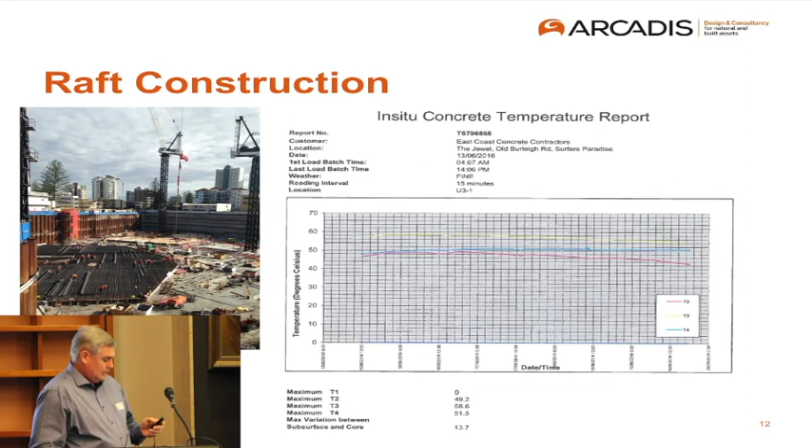So some of the photos of the pours, as Ray said, these were big pours. There's a lot of concrete. They started early in the morning with placing of the concrete and worked through the day to get the concrete in. Interesting, the biggest challenge is getting the concrete finished. Getting it placed, you could have it done mostly by about midday, but you then need to let the concrete set and get the guys in to actually finish the concrete, which takes just about as long.

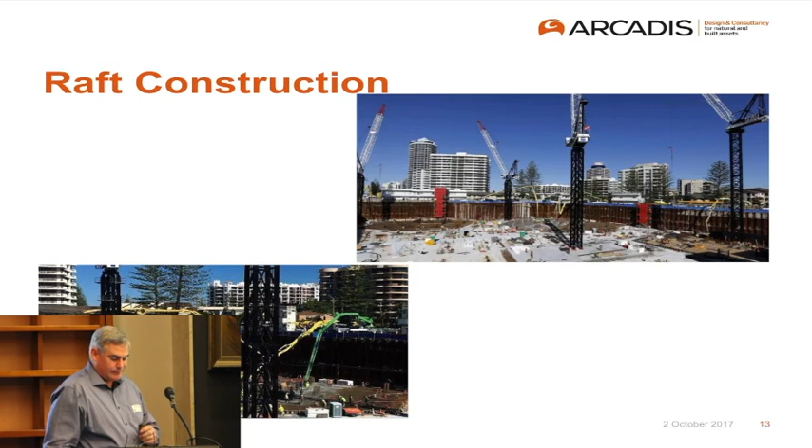I thought I'd just finish up and throw up some of the photos we had during the construction process. So here on the left, this is where the seawall is. This was a step in the podium slab where the seawall comes up and finishes, going into the podium 1 level. We've got the cores coming up, and the site, as Ray said, was a very big site, 11,000 square metres.

It was a big site. There were quite a lot of pours, and you saw the photos of that podium level with pools and planting and other things. There were quite a lot of steps and ups and downs going around through there that took quite a lot of detailing and work to get done. But it's all done now, and it's worked quite well.

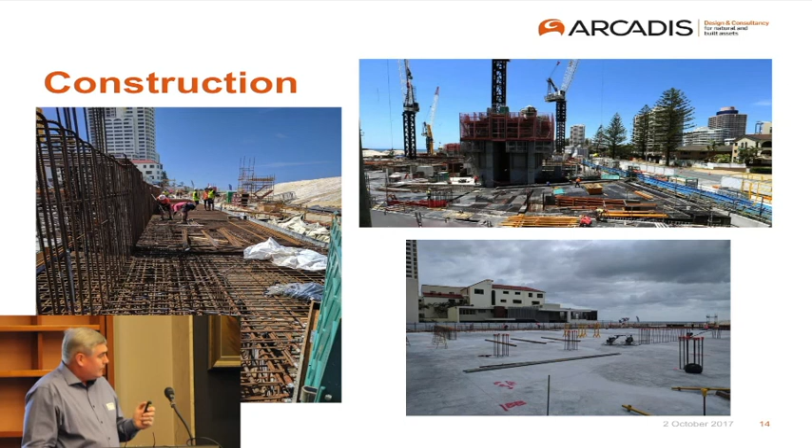This one, on the left-hand side here, you can see the slope in the podium. This is basement 1 level. So we have the slope of where the boulder wall had to go through in the basement level. Looking at Tower 2, that's looking across at the core for Tower 2, it was starting to go up.

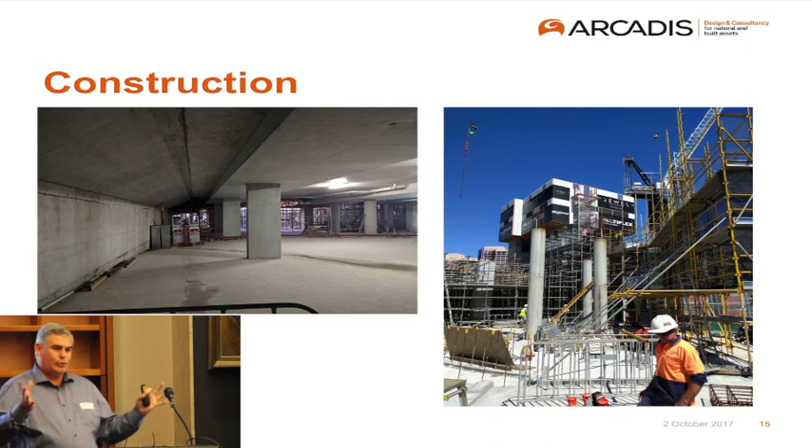Ray had some pictures up showing that porte cochere, which was fantastic, very, very nice views, tight in underneath the towers. Presented some challenges for us. Thought I'd show you these - the one on the left is the starting of a sloping column. We had to rake one of the columns from the edge of the building back down to one of the internal columns, so that's starting to happen. On the right-hand side there is the sloping columns we had to build and sloping walls that were part of the Tower 1 construction. So that was them starting to happen.

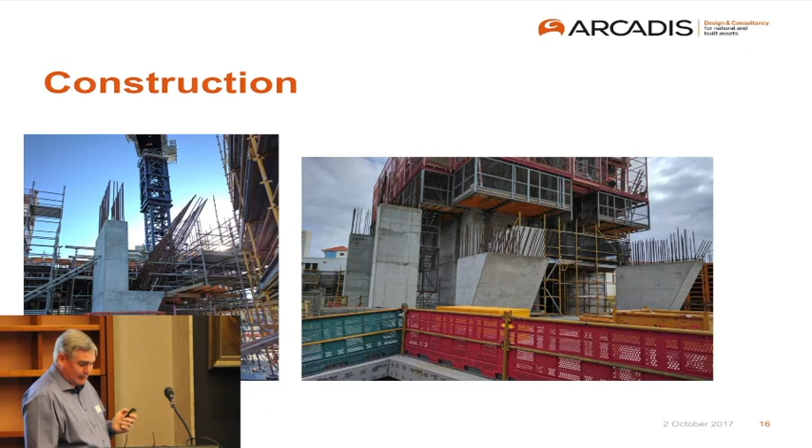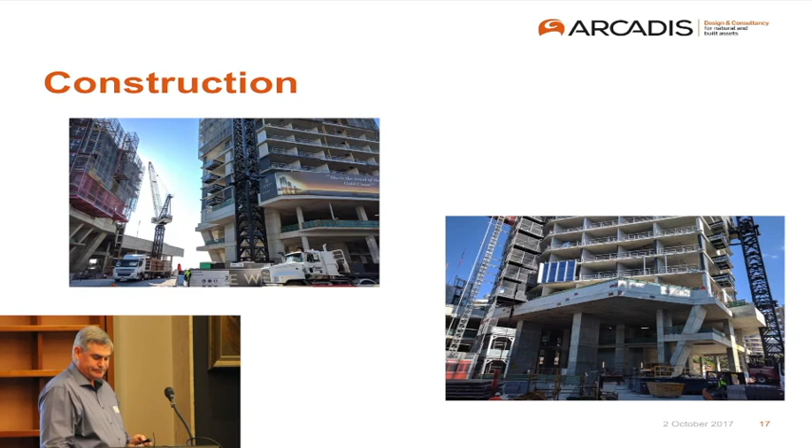As you go up, this is relatively recent, as of about a week ago, and you can start to see the podium areas and the sloping columns and the work that had to go into those to get the structure back into where it was, where it allowed that porte cochere structure to be built in. There's some more pictures just looking up from the towers, looking down onto Tower 1, the sloping columns and where that porte cochere is. So it's quite an interesting exercise to go through in detail.